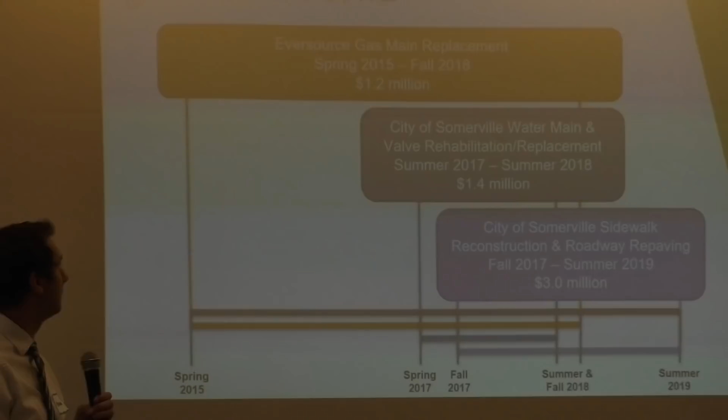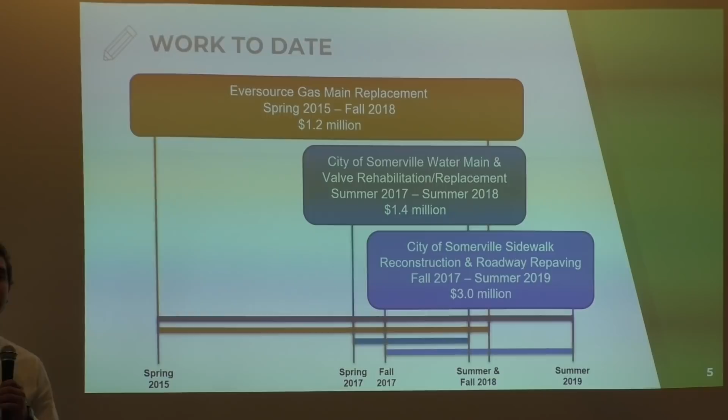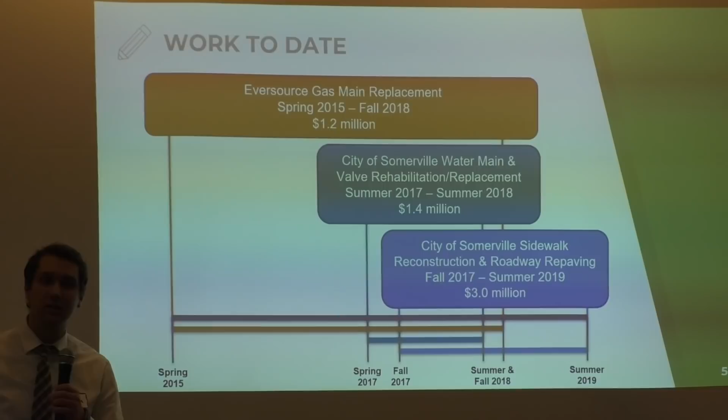So just to expand on the history lesson Katiana gave us a few minutes ago, the work on Powder House Boulevard first started with Eversource back in spring of 2015. They've been working on a gas main replacement for about 3 to 4 years total. As that work was wrapping up, the city came in with a water main valve rehabilitation and replacement project. As that work was finishing up, we came in and have continued to reconstruct the sidewalks, and ultimately will repave the section still outstanding, from between Mason and Burnham over to Alewife Brook Parkway.

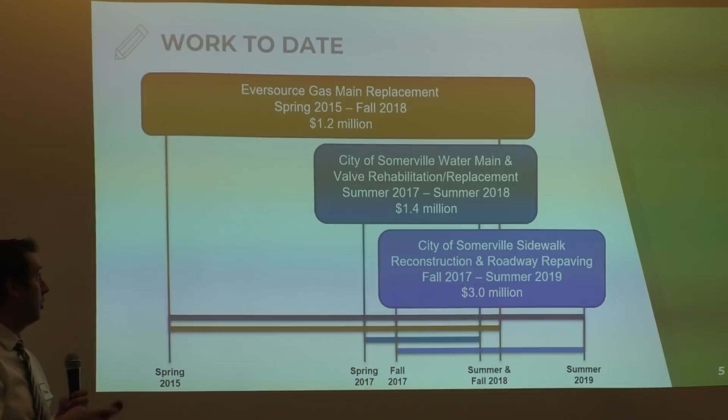So when you look at the numbers, there's already been a substantial amount of investment in Powder House Boulevard, which is great. It's an aging street, it's been around for a long time, and there was a lot of crumbling infrastructure that really needed to be addressed. It's $5.6 million so far between the city and Eversource, and that's a chunk of change for the city, and it's really important that the city has made those investments. The one thing that hasn't really been addressed through these projects is surface treatments and how people get about. This is all maintenance work, bringing things up to standard, but there hasn't been any special focus paid to how people move around, and that's what we're trying to address now as we near the end of this project.

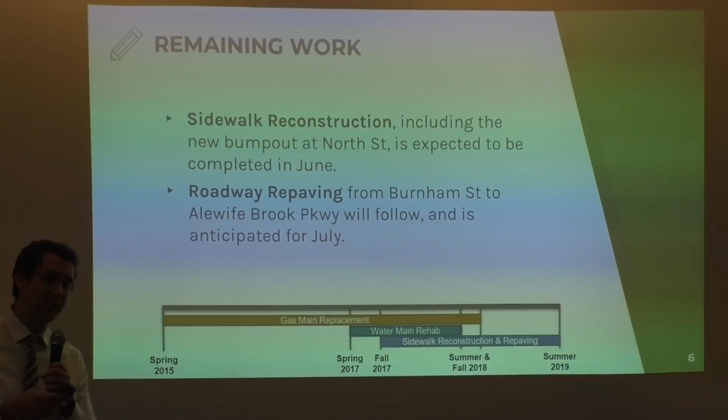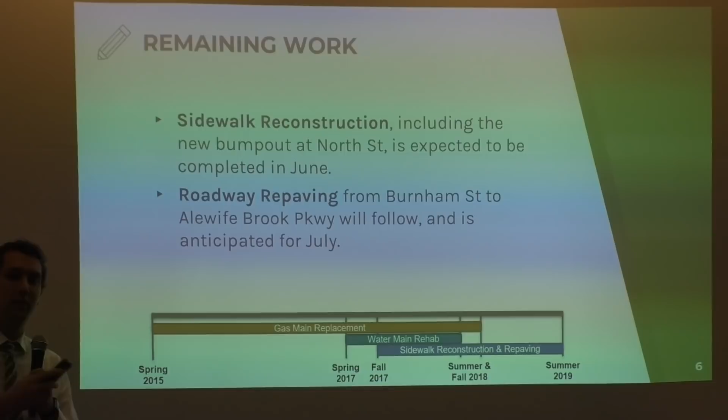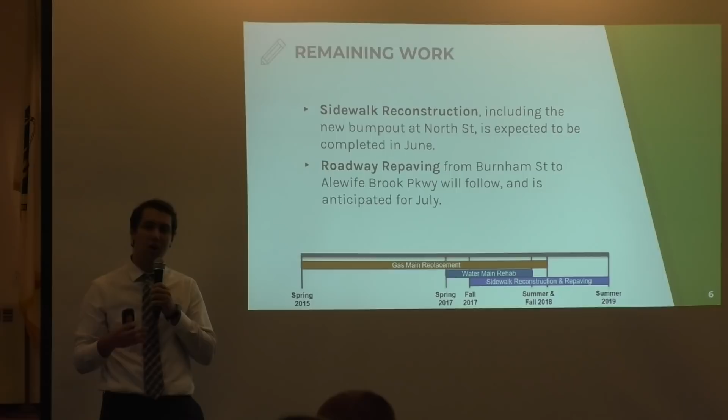In terms of timeline and wrapping up the sidewalk reconstruction and repaving work, the city's contractor, DNR, is finishing up the sidewalk reconstruction work between the school here and North Street. There will be a bump-out over at North Street. For those who don't know what that is, the sidewalk is going to be extended where it turns around the corner. So if you're taking a right from North Street heading down to Powder House Boulevard, and then a right towards Alewife Brook Parkway, that will be bigger, so it prevents cars from going as quickly around that turn and shortens the crossing distance for pedestrians as well.

All of that work is expected to be completed in June, at which point the contractor will come back in and repave the rest of the street that is still in poor condition. That will be, like I said, from about Mason Burnham all the way over to Alewife Brook Parkway.

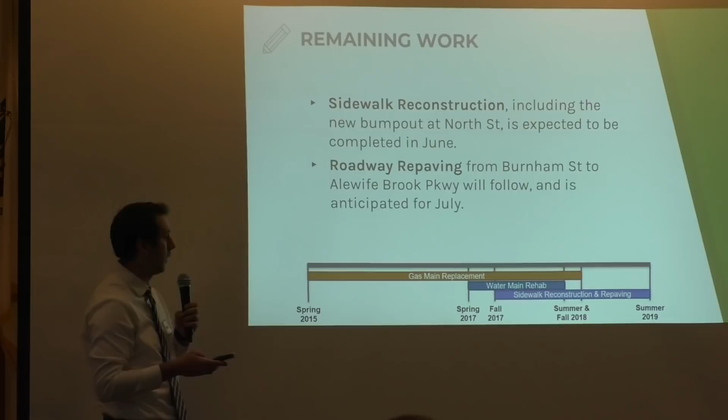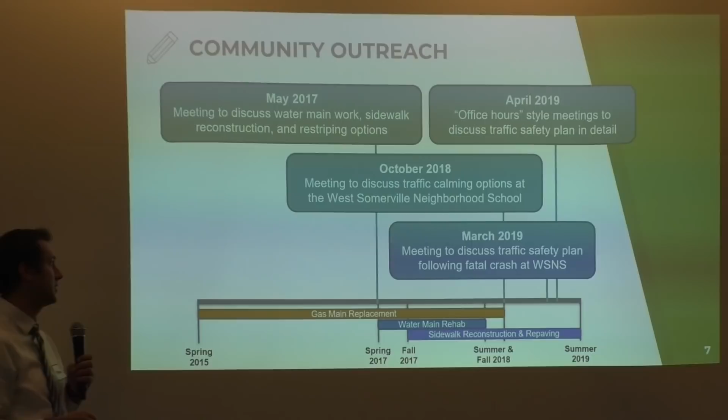There's also been some community outreach going on throughout this process. As Katiana mentioned, there had been a petition submitted calling for additional safety measures, particularly in regards to the school and pedestrian safety. There was a meeting back in May of 2017 when this work was first going on, to talk through things and discuss potential options in terms of restriping. There was a meeting about a year later for a more in-depth discussion on traffic calming at the West Somerville Neighborhood School. More recently, as the city put together a traffic safety plan for Powder House Boulevard, we had a meeting back in March, as well as a couple of smaller office-hour style meetings in April, and that brings us to today.

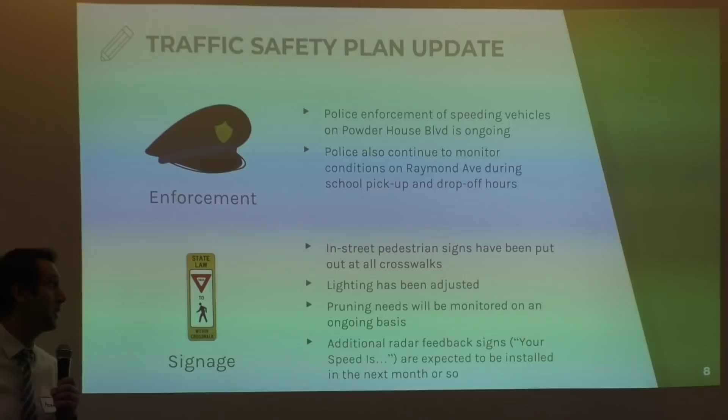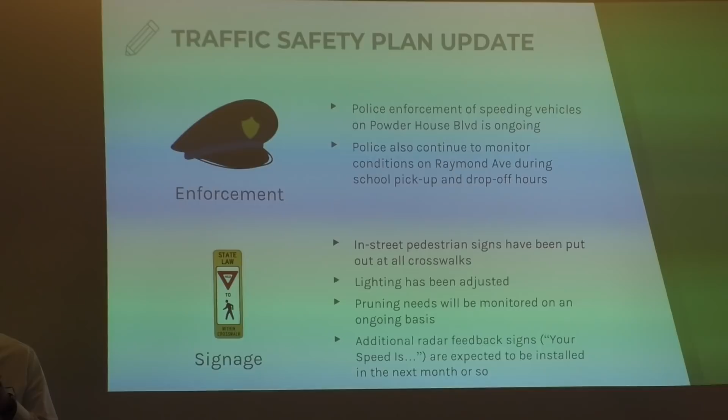For those of you interested in the traffic safety plan and concerned about safety, particularly for pedestrians on Powder House Boulevard, I have a few updates. In terms of enforcement, police enforcement of speeding vehicles on Powder House Boulevard is ongoing. I've seen officers out there when walking around the neighborhood, which is great, and that will continue on an ongoing basis. Police are also monitoring conditions on Raymond Ave during school pickup and drop-off hours to make sure everyone's staying safe. Some signage has also been added to the boulevard, in-street pedestrian signs.

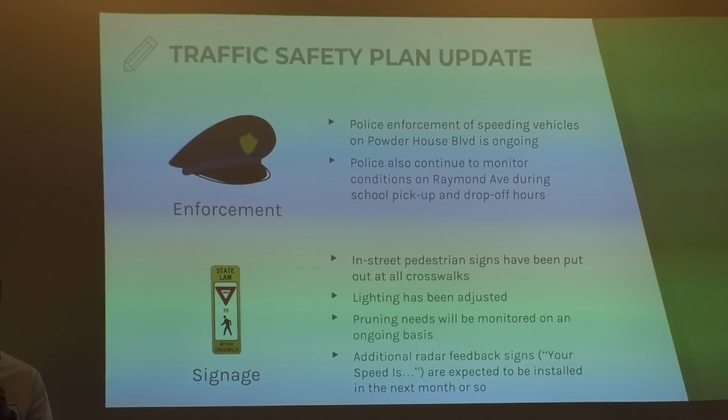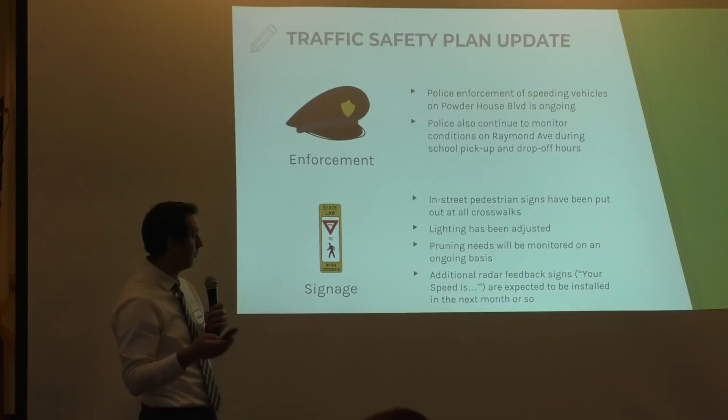Those little yellow guys in the crosswalks are out on all of the crosswalks that cross Powder House Boulevard. Lighting has been adjusted and turned up out here outside the school, so at night it's a little bit clearer. There's more visibility, and it actually makes signs more reflective when there's more light shining on them. So we've been responsive to requests in that regard.

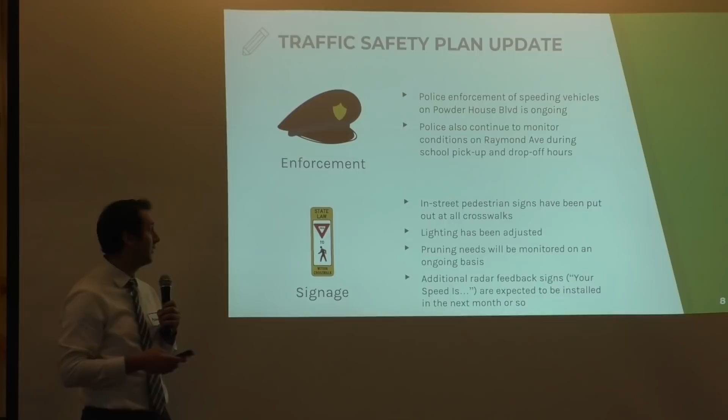Pruning needs will also be monitored on an ongoing basis if any tree limbs are getting in the way of signs. And then we'll also be putting in additional radar feedback signs, which are those ones that flash and say your speed is and tell you to slow down, over on the Mason, Burnham, and Leonard section.

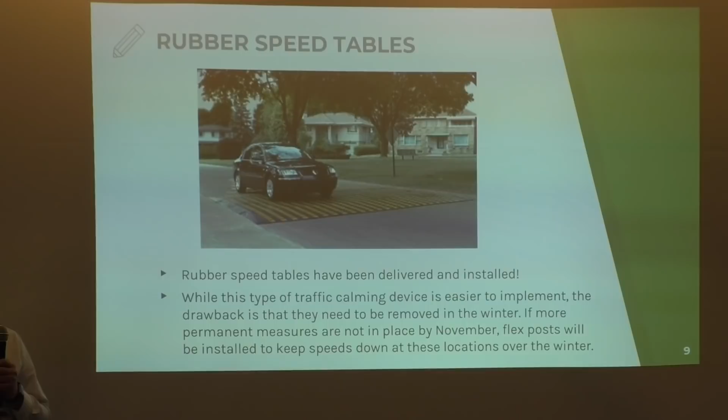So I wasn't sure exactly where this would land, but we actually do have rubber speed tables outside of the school as of this morning. So we're excited. We tried to turn these around as quickly as we could. It seems like they're working well so far.

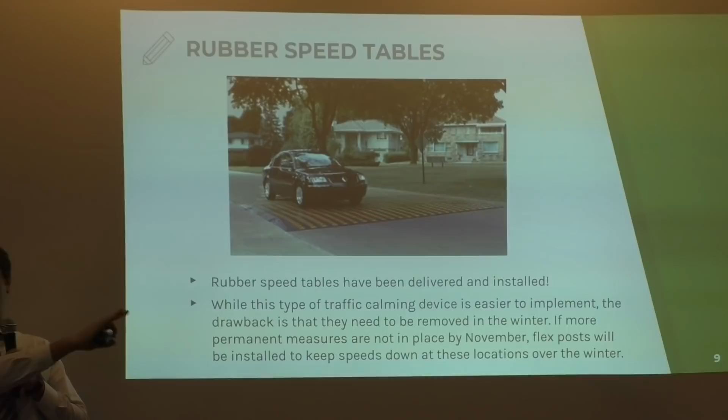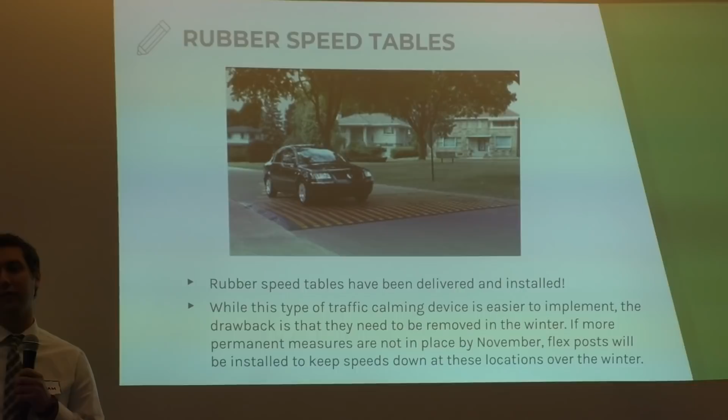We may need to make adjustments, so I'm going to ask you guys to bear with us. This isn't the type of treatment anyone else sees in Somerville, because I'm 99% sure we don't have this anywhere else in Somerville. But we knew we had to be responsive to the community's needs here, and that people really felt it was important to slow cars down, and we recognized that, and we agreed with you.

So we're going to monitor this. We're going to see how well it works, see if there are any negative consequences that maybe we didn't anticipate. It's an iterative process, so we're going to continue to work with you. We want you guys to reach out to us if you recognize any issues as these continue to play out.

There will be repaving that will need to happen at one point, so when that happens, we will have to remove those, and then the speed tables will go back in after repaving is complete. The one thing I should note is that these are a temporary material, so they do need to get pulled up in the winter, because if not, plows will rip them up.

So to mitigate that, we're going to be trying to put in more permanent interventions in the meantime. However, if that doesn't happen, we will be putting in additional flex posts at those locations to try and keep speeds down over the winter, and then put in permanent measures next spring. And to be clear, we do plan to put them back in next spring as well.

I think you have a question over here. I've seen the tables out on the boulevard. They're not striped like the ones in the picture, and they're hazardous right now. You're not going to be able to see them at night. Someone's going to get hurt, it's bad the way it is. There are too many of them in a short section. They're not marked, there's no signs, they're not striped. If you're going to use them, you've got to use them at minimum like what you have in that picture, and those are not like that right now.

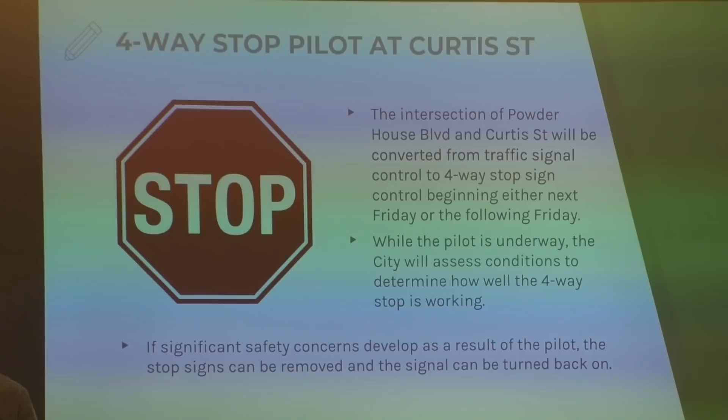So in terms of additional measures, the city is also planning to implement a four-way stop at Curtis Street. We will be either putting the signals on flash, if that's possible. When they go into the cabinet, we'll know if they can put it on red flashing at all four ways. If not, they'll bag those signals. We will put up stop signs for all four corners at that point, and then we'll be testing that out for 60 to 90 days to see how that works. So if that doesn't happen next Friday, it'll probably be happening the following Friday.

So they take those lights down? They're gonna take the lights down? Should we wait?

I think when you're saying what they're putting in, can you say what happens to what's there now? So the lights won't come down at this point—we'll either be just covering them or putting them on red flash.

Yeah, because I think if we do that, you're going to find out they're big trucks. I live on Powder House Blvd, four houses in. They put the stop signs there, and they work good, but the problem is during rush hour I can't get out of my driveway. They stop at the stop sign going either way, gun the gas, and they're going 30 by the time they're four houses from the stop sign. So the traffic coming this way at night, there's 30, 40 cars. I want to sit on my porch, I got cars—we never had it before. Now you got a stop sign, you see why it's there.

So again, this is a pilot, so we're going to be testing it. If things go poorly and it's determined that the signal really should be there after all, we can always just unbag those signals and take down the stop signs.

So what is the metric for being good or bad? What is your core metric? Safety is one, queuing is another. If cars are backing up in every direction and it's backing up into other intersections and causing safety concerns, that's one thing we'd need to address. If, God forbid, the number of crashes increases, that would obviously be something we'd have to look at. So general safety—if pedestrians aren't feeling comfortable, or people are taking a long time to cross the street—those would be a few of the measures we'd look at, as well as taking into account resident feedback.

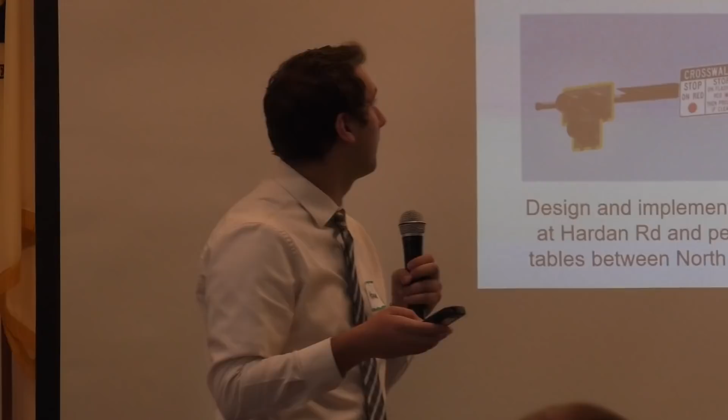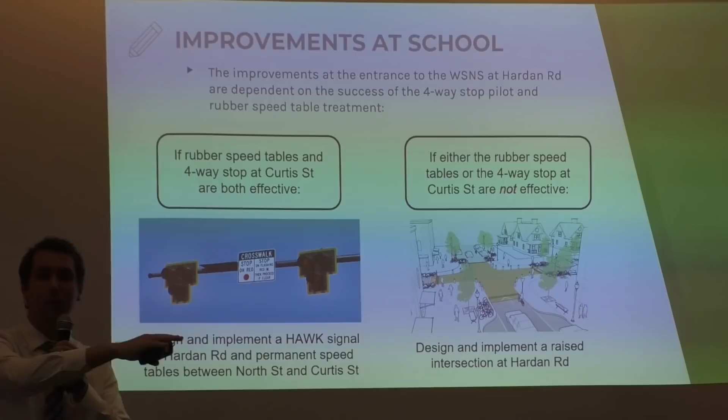So the last piece here is the improvements specifically at the school, some of the longer term improvements. What the city has proposed is to make the speed tables that have been put out here permanent in the long term. We'll need to go through a design process to make sure that happens, and as that's going on, we'll also be working to design a signal at the school.

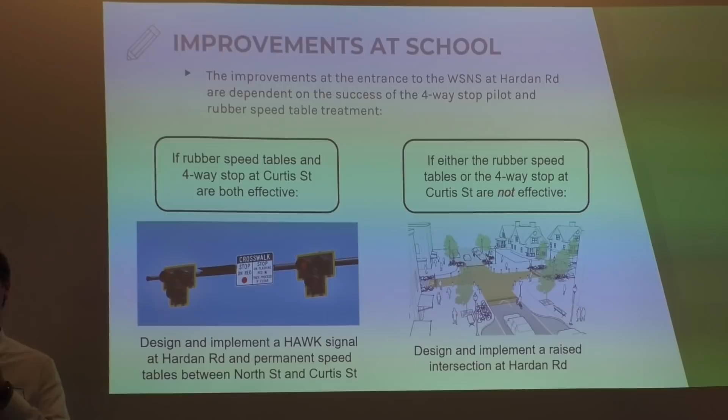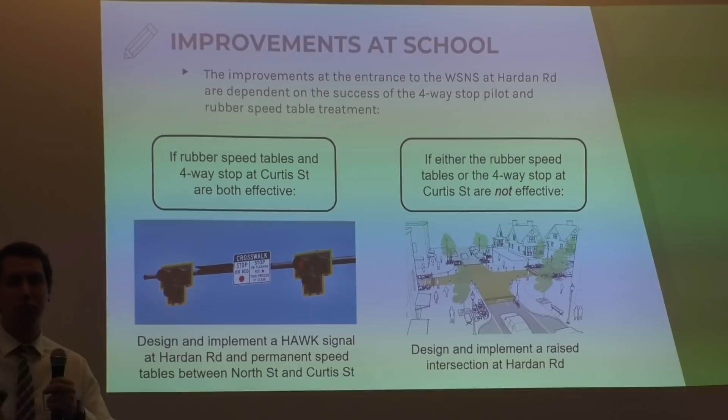So we have a rapid flashing beacon out there right now, which flashes yellow when someone presses the button, and then you can cross the street, and cars are expected to stop. However, we've gotten feedback that people don't always stop. So a HAWK signal actually turns red—it flashes yellow first and then turns red—and that would be a true stop condition for people to cross more safely there.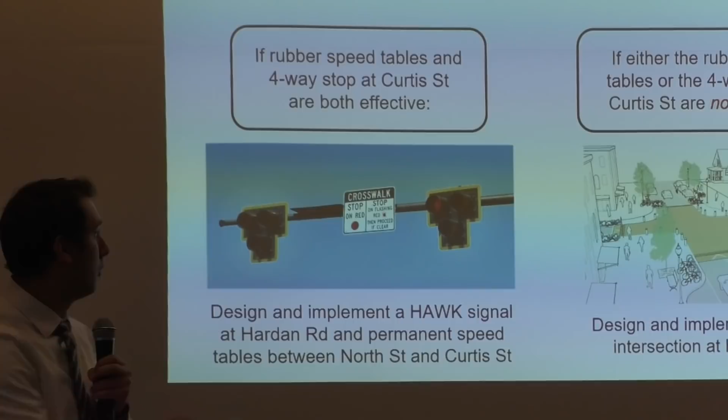If the rubber speed tables we put out and the four-way stop are both successful, we'll move forward on that measure. However, if we find the speed tables aren't working that well, or the four-way stop pilot isn't working, we'll go back, reassess things, and probably look at potentially putting in a raised crossing, a raised table out here at the school, as the alternative.

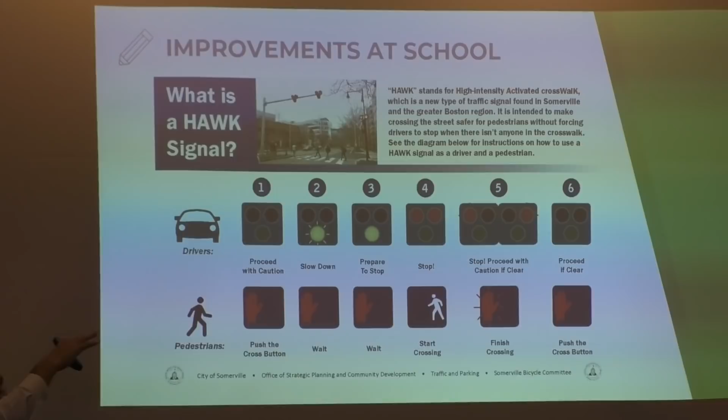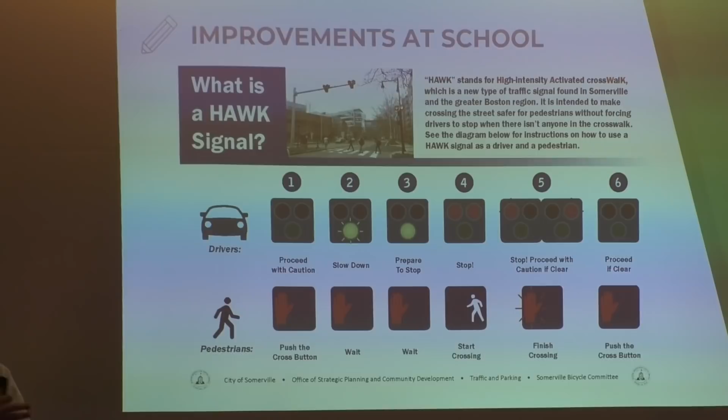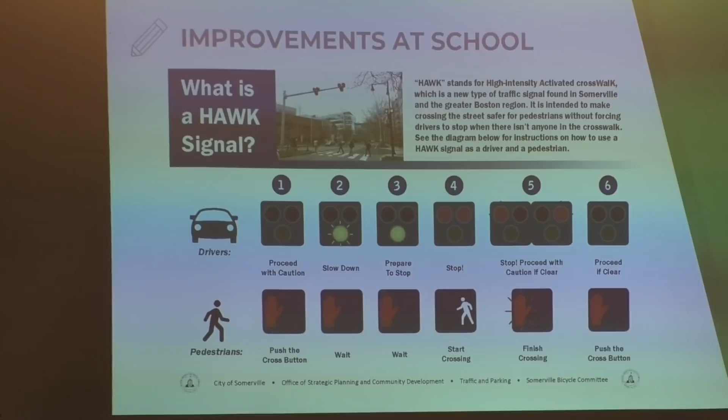For those who don't know, I'll explain a little more: the HAWK signal is dark for drivers when people aren't in the crosswalk, but when a pedestrian presses the button it flashes yellow, then turns red, and the pedestrian gets the walk signal. After they're done crossing, the signal toggles between the left and right bulbs up top, which means drivers can go when they know it's clear—just an easier way for people to proceed when they know no one is in the crosswalk.

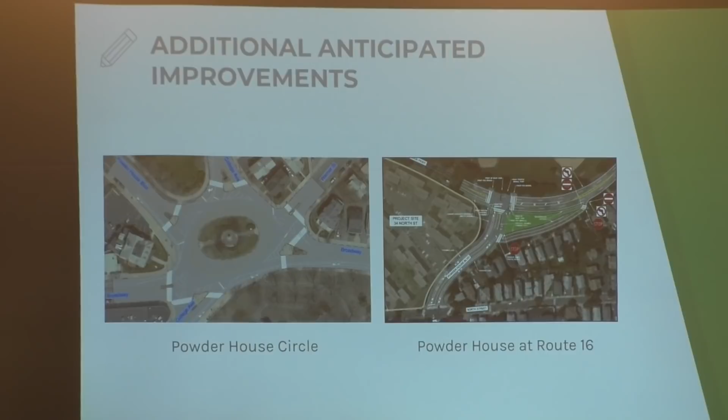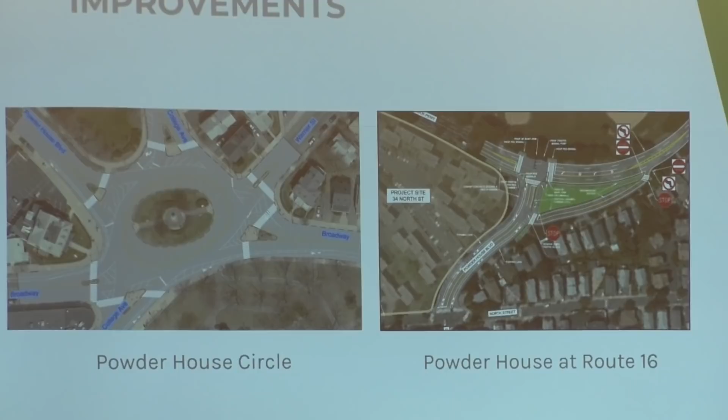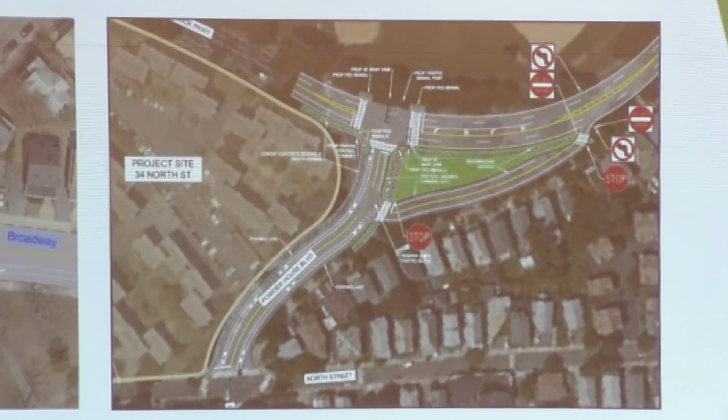So the last piece I wanted to touch on is the pedestrian improvements and the longer term improvements to the boulevard. We're also continuing to think about Powder House Circle and Powder House over at Alewife Brook Parkway and Route 16, so either end of the boulevard. We're still planning to implement some interim, short-term interventions down at the circle to narrow things down to one lane, as well as continue to work with developers over in Clarendon Hill to rethink what the intersection at Alewife Brook Parkway and Powder House Boulevard looks like. That's a longer term project, a little more far off, but something mentioned in our traffic safety plan. I want to make sure people are aware of it.

Thank you. As a reminder, we're hoping to spend a lot of this meeting having you give input on the piece we'll talk about after this, but we want to do clarifying questions now so we can understand what's happening and what the city is planning. Then you can comment more in writing, via phone, or email. I see two hands here, and I'll look around the room for others.

In the back, yes. And can we get a microphone? Can we run a mic? We have one here, we can use this one. Brian, will you run a mic, or somebody? George wants to say something.

George, go to questions. I also want to note there are a good 20 of you standing in the back. I know this is the scary zone, but there are stools up here people are welcome to, and a whole ton of chairs over here. Feel free to make your way across. I know it's a little uncomfortable, but find your way to a spot you're happy with for the evening as best you are able. Perfect, good job.

Brian, can you walk around to people? Okay. My name is Judy Jacobs. I live in Ward 7. Okay, you can't hear me? Can you hear me now? Okay, my name is Judy Jacobs, I live in Ward 7, and one question I have is, could you please explain a little bit more about

The city has had a number of infrastructure projects going on. It started with Eversource and their gas main work, moved up to the city doing water main work, and now we're coming back through repairing all the sidewalks and the tree planting strip. We've repaved a piece of the boulevard, but we're repaving the rest in July.

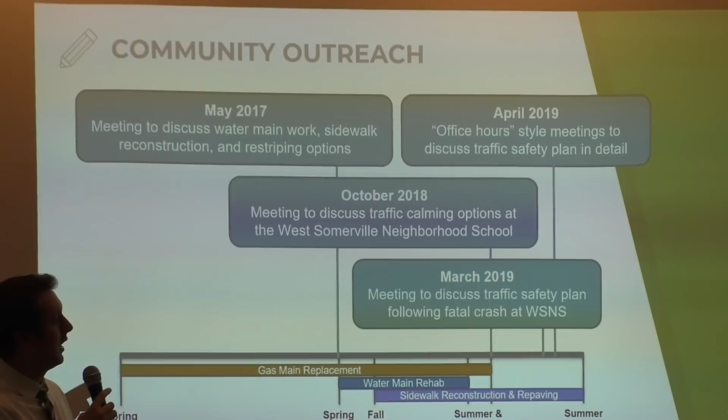There's been some community discussion going on. The city has reached out—we've discussed traffic calming, striping options, and a traffic safety plan as well. That's brought us to where we are today: how is the city going to restripe the street when the boulevard is completely repaved?

There's a lot that goes into that decision, and that's something we need to hear from all of you about—what are your concerns, what are your needs?

There's also a large piece that has to do with what are some of Somerville's goals as a city, and where are we trying to move. SomerVision is one of those major goals.

We went through the SomerVision process back in 2010, and we're going through a new SomerVision process now to really figure out what the community wants and what we're trying to build together—as a neighborhood, as individual neighborhoods, as a city. Whether we like it or not, Somerville is growing, new development is coming in, and things need to change, so the status quo no longer stays the status quo. The city needs to continue making improvements, to iterate, and to build the community we all want to live in. So SomerVision is the overarching principle.

There are also a couple of action plans the city is developing or has just developed. The Climate Forward Plan has come out recently—the city is working toward actionable goals to reduce our carbon footprint and make Somerville more livable. We've also been working on a Vision Zero action plan. For those who don't know, Vision Zero is the goal of eliminating all traffic fatalities and serious injuries on Somerville streets.

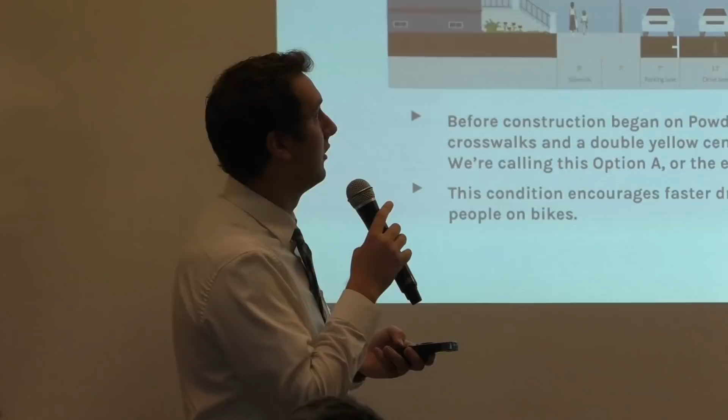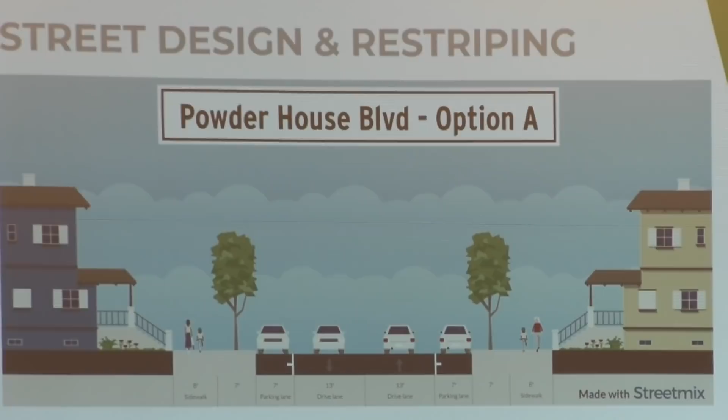I want to walk everyone through the options we have right now. Option A is what Powder House Boulevard looked like before any construction started: a lane of parking on either side, a travel lane in each direction, and just a double yellow center line running up and down the street, in addition to crosswalks where they're warranted.

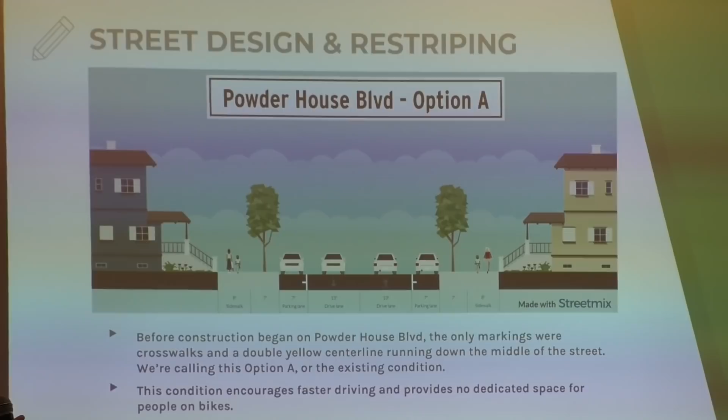This condition generally encourages faster driving, and it also doesn't provide any dedicated space for people who choose to bike up and down the boulevard. For people who aren't used to looking at this, can you orient them and show them?

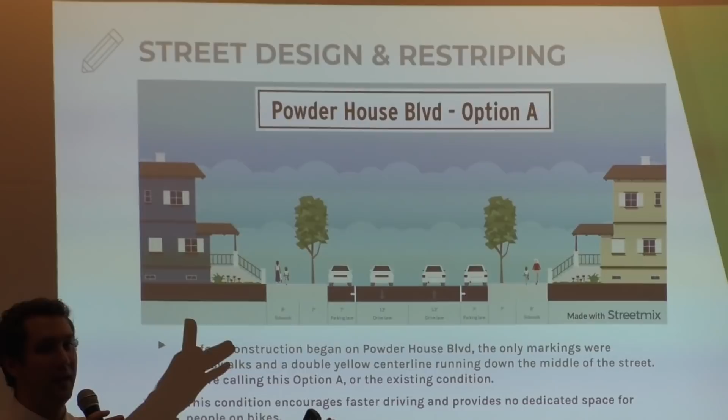Sure, that's a great point. This is a website common in transportation planning called Streetmix that lets you build a cross section—we can basically imagine we've taken the street and are looking at a slice of it.

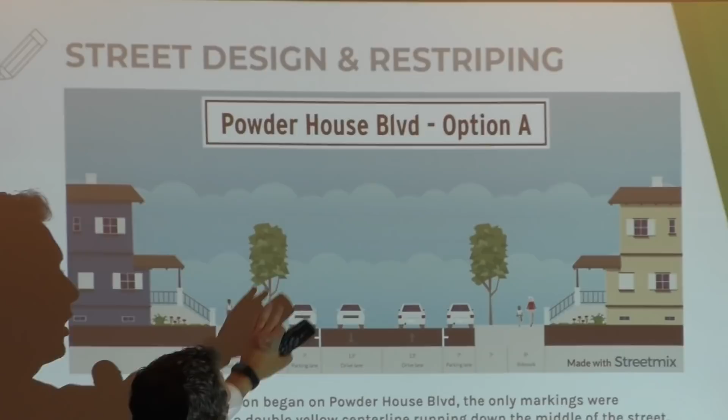So imagine you're coming from the Rotary and walking towards Packard Ave. There's houses, the sidewalk, then the tree planting strip, and then a parking lane, travel lanes in either direction which are currently 13 feet wide. The standard travel lane width is 10 or 11 feet, so this is wider than a highway travel lane right now. Then another parking lane, and then your other sidewalk.

However, in recent years the city's begun to investigate whether improved street design plans can be implemented when a street undergoes repaving. We like to think about things as a clean slate - we don't have to remove any markings, we get a fresh coat of pavement, and then we can think about if there are any improvements that can be made. Option B was born out of this process.

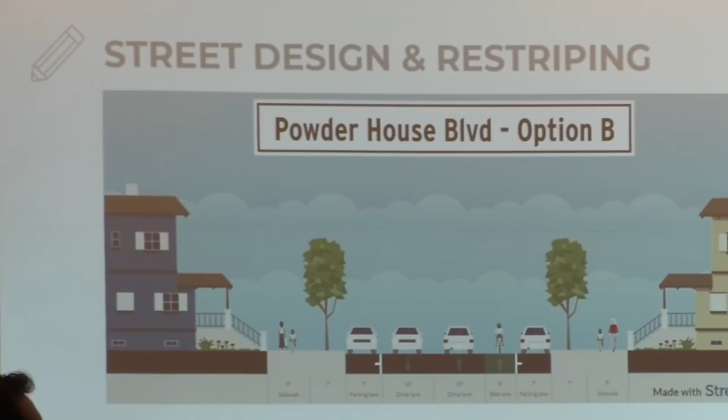It includes a bike lane in one direction. So if you're traveling from the Rotary to Packard Ave, the bike lane would be heading towards Packard Ave between the rightmost travel lane and a lane of parked cars. Coming in the other direction would just be sharrows, and bikes would travel in the same lane as motor vehicles.

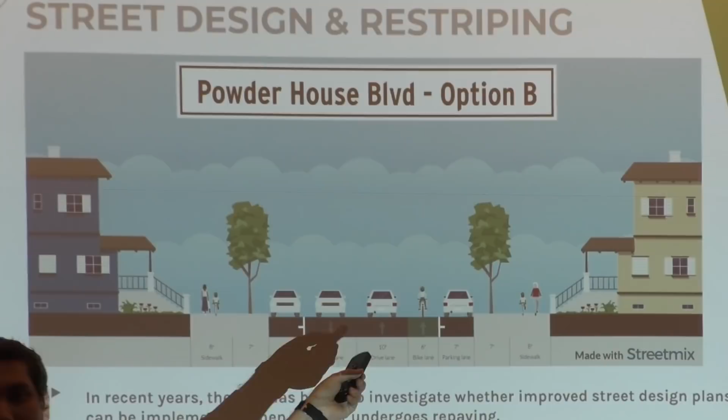Two things - people don't know what sharrows are, and you also have in your handout one side talking about these same things, so you can cross-reference. Yeah, you can reference that as well.

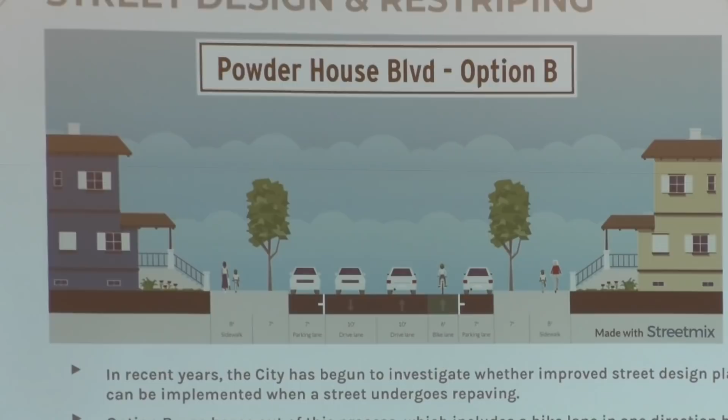A sharrow is what you've probably seen out on some of the streets in Somerville. It's a bike symbol with two chevrons above it, two arrows. That isn't a dedicated bicycle facility - it just sort of guides cyclists as to where they should be on the roadway, as well as informs vehicle drivers that there could be bike traffic there, to make them more alert on that front.

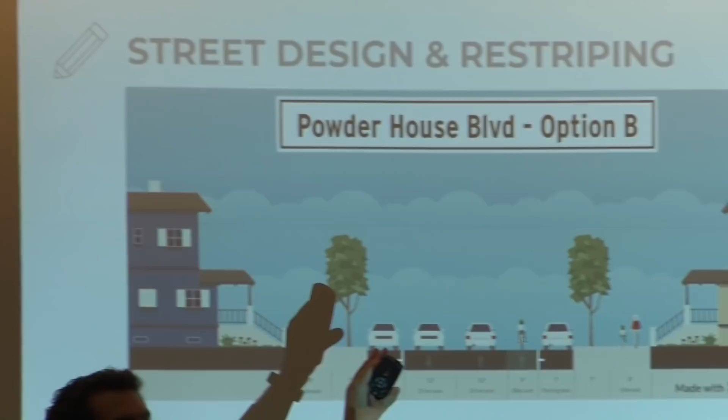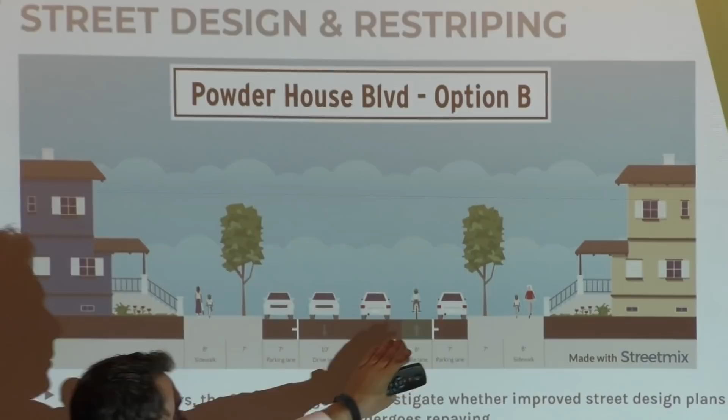So you said that's looking at us coming from the rotary, right? Is it? Yeah, actually, good point - Powder House Circle. But it actually doesn't matter, it's going towards Packard Ave from either direction. The bike lane would be on the right side here, so it actually switches at Packard Ave.

So if I may clarify, what this does is it doesn't take any parking out. It just narrows the travel lanes a little bit, which will slow traffic down because you're narrowing the travel lanes, and takes some of that roadway that had been used for travel lanes and puts it into a bike lane. You can't get one in each direction doing this, you can only get one in one direction. So the theory was to put it in the direction where you're running more uphill, and allow the downhill bikes to flow with traffic in the other direction - that's why it switches at the midpoint. This, which is option B on your form, doesn't change the parking situation - it just takes some of that travel lane width that was pretty wide in option A and puts it towards the bike facility.

Yes, thank you, George. Sure. There are a couple of additional options that are also under consideration.

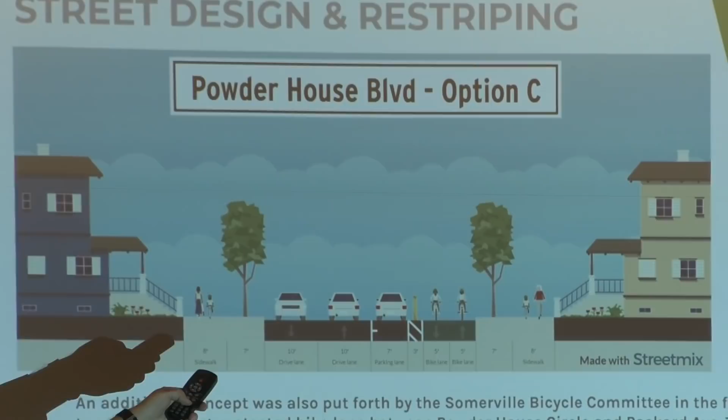One of these, put forth by the Somerville Bicycle Committee, is a two-way bike lane on one side of the street. Looking from Powder House Circle towards Packard Ave as the example, it would be on the Tufts Field side - a 10-foot wide bike lane with bikes able to travel in both directions. There would be a 3-foot buffer with some flex posts, and then cars would be able to park next to that, plus the two travel lanes. The trade-off is that it would require converting one of the parking lanes into a bike lane to allow adequate width for all users.

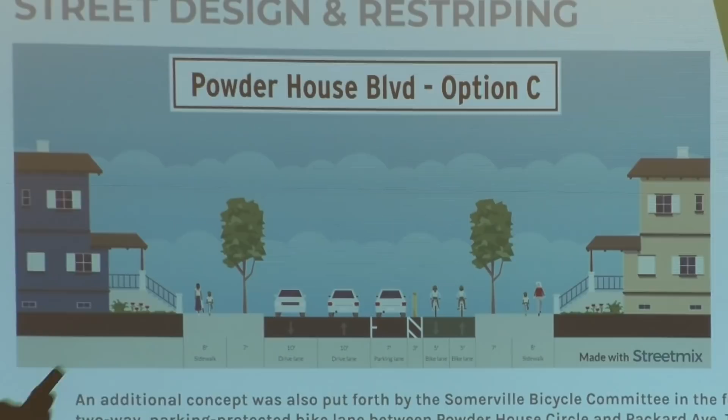How wide are the travel lanes? The travel lanes are 10 feet wide in this case, which is what we would aim for on a street like Powder House Boulevard. It's wide enough - 10 foot is wide enough.

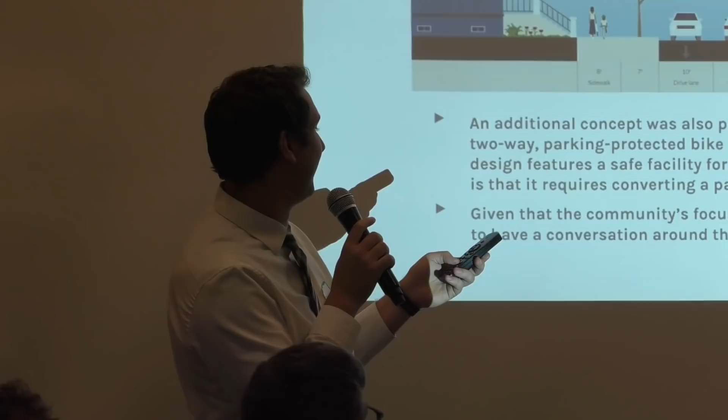There is also a fourth option, option D, which would require converting one of the parking lanes into a bike lane. However, this option splits the bike lanes so that there's one on one side against parking with that buffer, and then another one on the other side of the street, more typical of what you'd see in Somerville on a street like Somerville Ave.

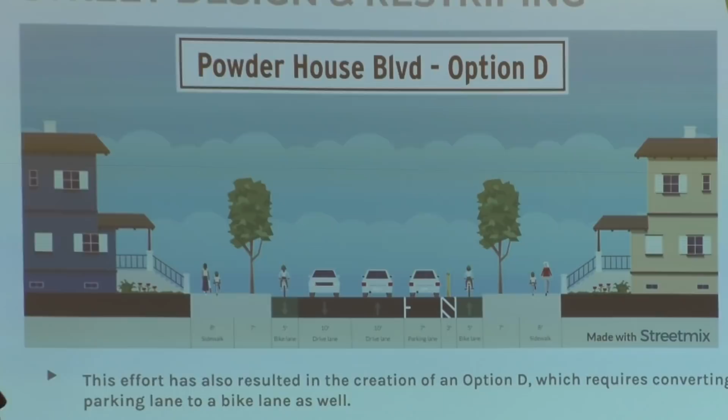This option is more of a traditional design, and intersection operations are generally a little bit more simplified, because if bikes and cars are coming on the same side of the street, it's easier for everyone to understand where they should be and who has the right of way.

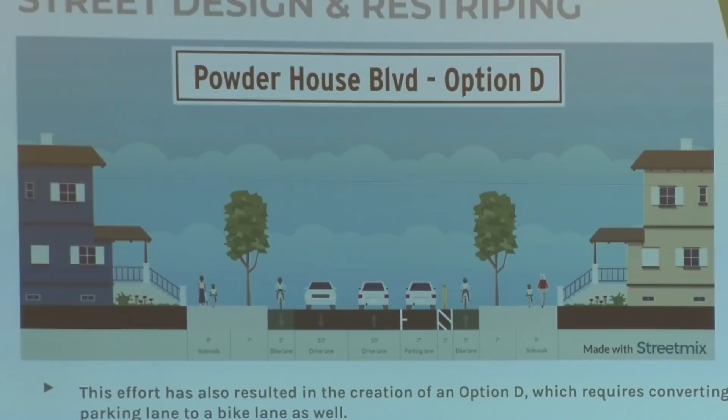One thing to note is that there may be enough room to get flex posts in here as well and make both sides protected. However, if this is something the community wanted to pursue, the city would need to do more investigating to determine if that's possible. So it could just be a bike lane against a travel lane, or there could be flex posts there as well.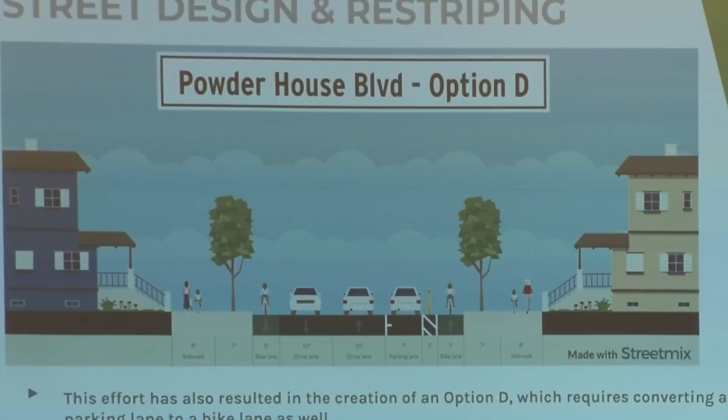We've already heard a lot from the community on this issue. A number of concerns have been raised, and there are a few things that continue to crop up as we go through this process. One is operations at our neighborhood institutions.

So I should say there's the Open Center for Children as well, and the Nave Gallery, also located in the church building. So there's Doherty's Funeral Home, the Presbyterian Church, Nave Gallery, Open Center, and the West Somerville Neighborhood School as well. There's also a great amount of concern for parking under special circumstances, such as street sweeping, snow emergencies, and Tufts events, when either the amount of parking is reduced or the number of vehicles parking on Powder House Boulevard is higher than normal.

So the city is also thinking through whether there are viable parking mitigation strategies if parking were to be removed, to help ease the burden. I'll talk through a few of these examples.

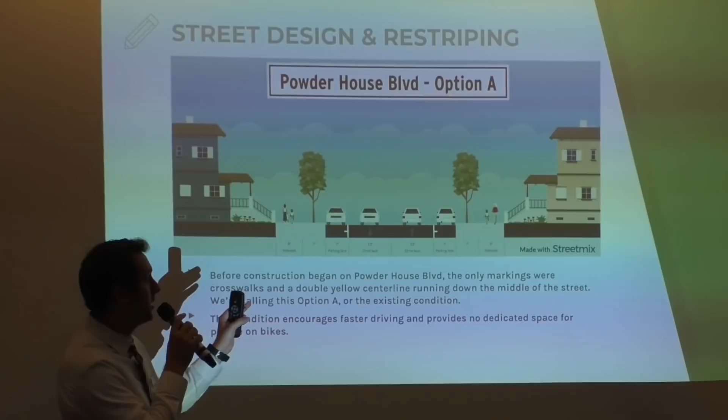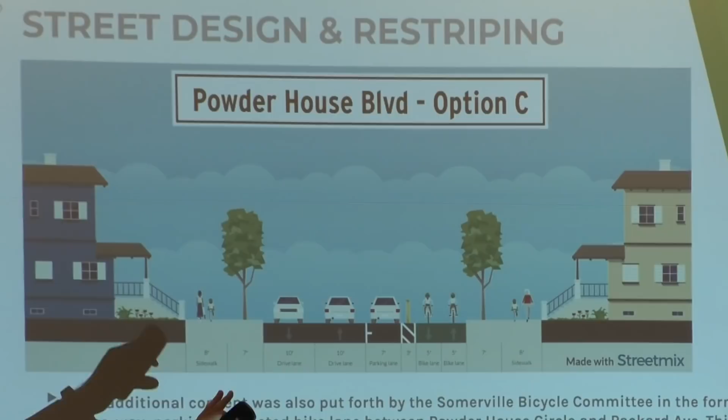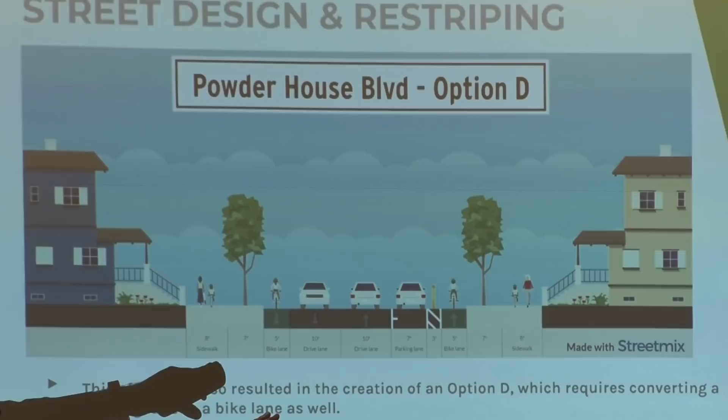Could you clarify the travel lane, parking lane, and bike lane widths on each of those cross sections? Under the existing condition, option A, we used 7-foot parking lane widths, the standard around Somerville, for all 4 options - that's a 13-foot wide travel lane in both directions today. In option B, parking lanes are still 7 feet, but there's also a 6-foot bike lane, and travel lanes narrow to 10 feet in either direction. In option C, travel lanes are also 10 feet, parking lane is still 7 feet, and there are two 5-foot bike lanes - really one 10-foot bike lane and a 3-foot buffer. In option D, it's a 5-foot bike lane, two 10-foot travel lanes, a 7-foot parking lane again, and then that 3-foot buffer with another 5-foot bike lane.

On the other paper, it says the bike lane will be on one side of the street part of the way, then switch over - why is that? The question was why would the bike lane switch sides. Generally it's safer if you pick one side of the street for a dedicated bike facility to have it in the uphill direction, when cyclists are traveling slower, because more cars tend to pass them in that scenario. There's not a huge hill on Powder House, but it is uphill towards Packard in both directions, so we'd have it on that side as you're approaching Packard.

Does it switch in option C as well? Oh, is that about the switching? Yeah, does it switch in C as well?

No, because there are full bike lanes in both directions in C and D, so it doesn't need the switch.

Which direction are we looking at there? Because there are no curb cuts at Tufts Field, this would be looking from Powder House Circle towards Alewife Brook Parkway at any point. So it would be on the Tufts side. If you're doing a two-way bike lane, you always put it on the side that has fewer driveways, because it's safer that way—less opportunity for conflicts.

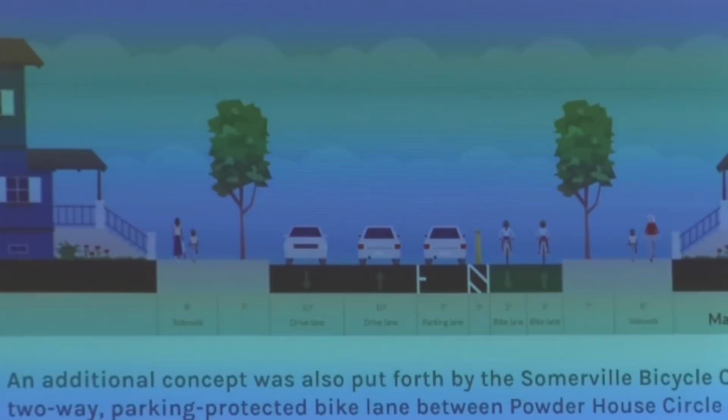I have a question about option C right here. Looking at it from left to right, car 1, 2, 3—my question is about the logic of having the parking be car number 3, the parking lane being right next to the bike lane, as opposed to it being on the other side of the street where that first car is, so then the 2 cars in the middle are the travel lanes.

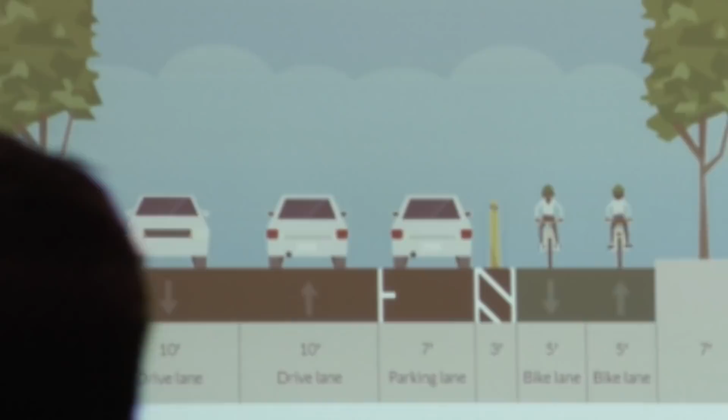Yeah, that's a really good question. This is what we call a parking-protected bike lane. Occasionally people get out on the passenger side and are expected to look, which also happens when there's a bike lane on the other side. This basically provides an extra barrier of steel for bicyclists, so if cars are parked there, they don't necessarily have to worry about a car veering off to the right—it provides a safer experience for bicyclists.

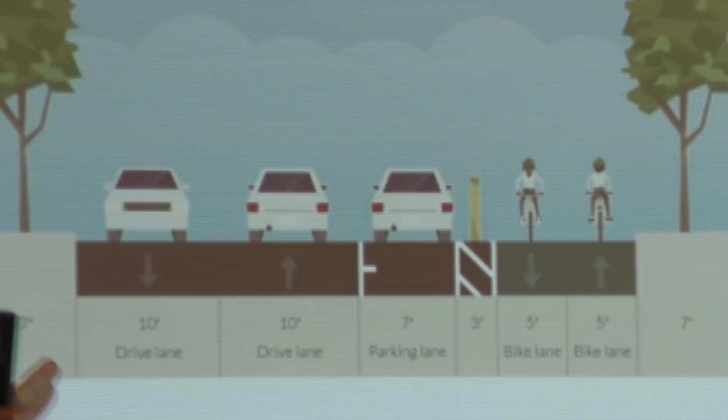You could potentially put it on the other side of the street as well, and in fact there is an option where you switch the sides of the street—maybe for part of it you have it here, maybe you move it to the other side. However, on Powder House, there is significantly more parking on this side of the street, so you'd retain more parking if you kept it on that side.

I'm just wondering, from the perspective of people who live in these houses—I have a car in my driveway and back out onto the street—what the safety is like backing up into the bike lane and then the parking lane and trying to get on the street, and whether cars can see you traveling versus being on the other side of the street.

Right, another good question. It would probably be similar to what you're experiencing today in terms of visibility.

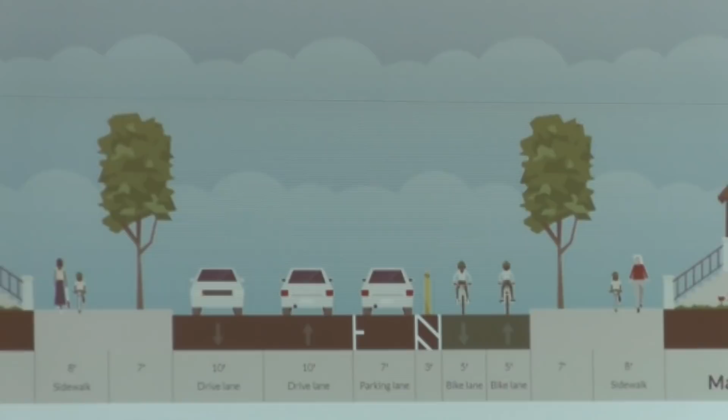You would have to check first to make sure there are no bikes coming, but given that, you would then back out and have similar visibility across the parking lane. If you're coming out on the other side though, you'd no longer have to worry about parked cars if you're on the even side of the street, and you'd have much better visibility backing out of your driveway on that side.

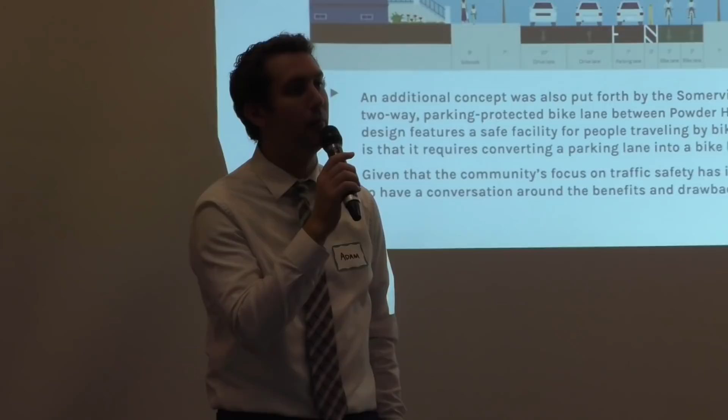Yeah, that's something we'll definitely need to continue to monitor, because that isn't necessarily a common situation across the city. However, if that is something that happens frequently enough, we will have to keep that in mind, certainly. I'm Brian Polstoid, one of the city engineers, and I'm who you end up talking to if you have a flooding concern - one of the many conversations I have. But yes, we do have a handful of flooding concerns and we are aware of this one. I've been working with Water and Sewer to find out the particular cause of it and why it appears to be happening more now than it had been. So yes, we are looking into that specifically.

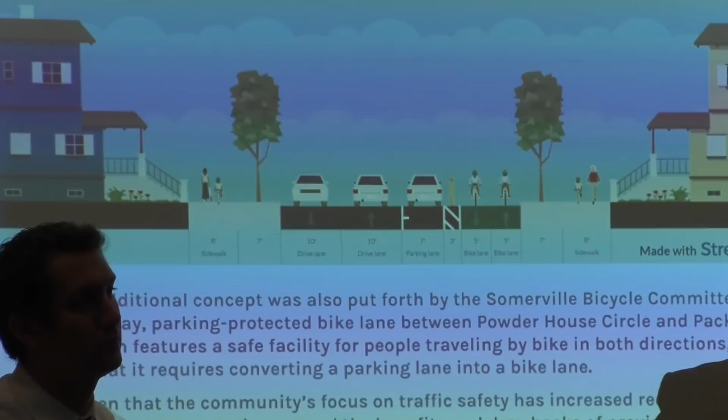Well, they're clogged as it is. Okay, just for a moment here, I think we're moving past a clarifying question. This is part of the conversation I want you all to have.

So all of the discussions of the ideas and suggestions that Adam was making to address parking are based upon the concept of if Option C or D became the preferred option, what could we do to address the impacts that would occur? We're not at that point yet.

What we're doing here tonight is suggesting that where we see the opportunity, when the chance comes up in the city to provide better pedestrian and bicycle access, like when we repave a street, we usually go through the exercise of trying to determine the best way to address a street for all users and what makes the most sense.

So what was the bicycle lane created for? What was the bicycle path created for? So why put in a bike lane?

Let me take a step way back here and try to answer the basic question of why put in a bike lane. In a number of places in the city, we're seeing a lot more interest in biking. We're seeing a lot more people who bicycle to get to work every day, and a lot more people who bicycle to get around town every day.

So one of the reasons why - may I finish, please? One moment. Okay, I would like to answer the woman's question, if I might. She asked why a bike path - she asked why add a bike lane on Powder House Boulevard, and I'd like to answer that question.